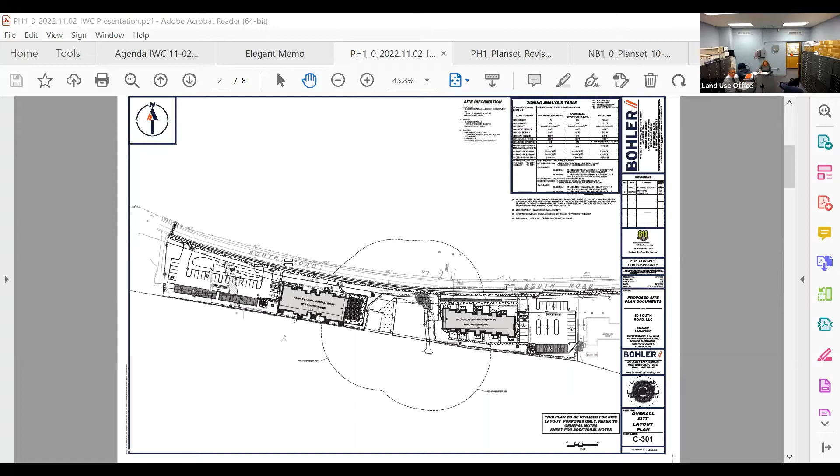Okay, so with that, we'll call the meeting to order. First item on the agenda is a continuation of the public hearing, 80 South Road LLC and Sager Development LLC.

I know, Jeff, do you or Phoebe want to take this, or do you want to give it off to the consultants? Thank you, Mr. Chairman, I'd give it up to Tim Hollister. Yes, I'm here, thank you. Can you hear me, Mr. Chairman? Yes, I can. Great.

Good evening, Commissioner Hannon and commission members. Tim Hollister, representing the applicant, along with Jeff Sager, Phoebe Sager, our consulting engineer Jeff Bord from Bohler Engineering, and our soil scientist Megan Raymond from SLR. Thank you, as always, to Mr. Sear, Ms. Rutherford, and Ms. Michaud.

Since we were here on the 19th of October, the applicant has responded to all of the staff technical and engineering comments. They were submitted to Mr. Sear last week. Basically there's no substantive change to the plans. I'd say most of the responses, which I believe were 75 in number, were information provided to clarify details. But I want to have Jeff Bord of Bohler Engineering take a brief couple minutes to explain the responses he filed. Jeff, go ahead please.

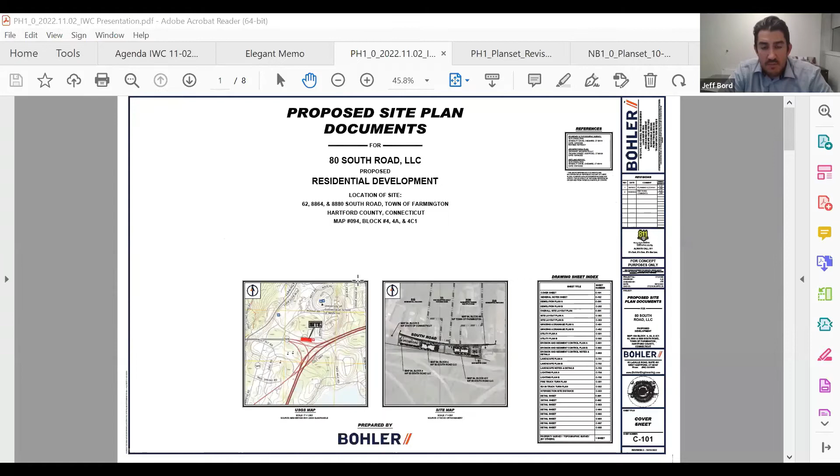Thank you, Tim. Hey Bruce, for the purposes of this presentation, this is the slide deck we had from the previous presentation. If you can go to slide 8, I think that would be the best representation of the colored rendering blowing up the area within the 150-foot upland review area. So to Tim's comment, out of all the comments we received, no substantive comments were received as far as the wetland impacts go.

As I presented at the last hearing, we did provide engineering documents that took the state DOT drainage discharges out of directly impacting the existing riprap in the middle of the site. Prior to our redesign, we originally had a pipe that was going directly to that riprap at the culvert, and I know on the site walk it was brought up that there was some destabilization that had taken place of that existing culvert. So part of our redesign efforts, we included notes to replace that, restore it in kind to what it should be with new riprap.

Part of what came up at the last meeting was also in regards to invasive species within the channel itself, so we had agreed to remove any of those that are encountered.

And I guess the biggest change from our end, and it affects the southwest portion of the upland review area to the rear of Building A. Originally we had a 5-foot retaining wall that came off the back side of those doors that exit the rear of that building. There was a retaining wall right on the property line that introduced about 5 feet of fill on that corner within the upland review area. One of the comments was the relation of that wall relative to the property line.

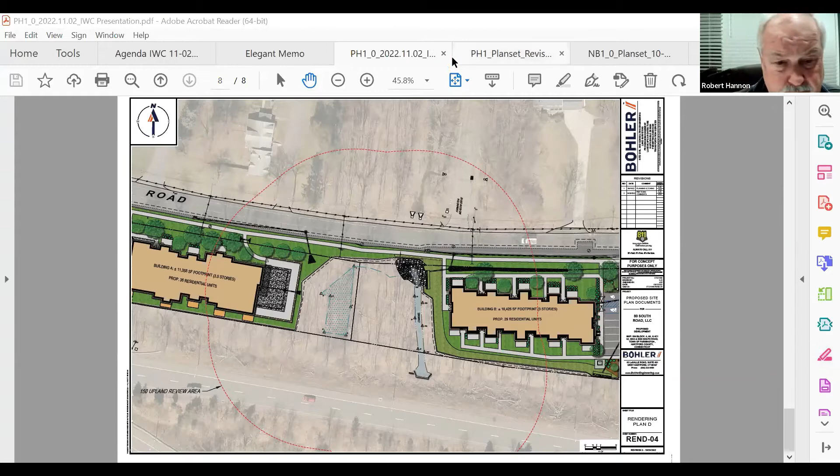And I want to note for everybody's information that Megan Raymond is running the New York Marathon on Sunday. Go Megan. I have one question, Louise. I have a simple question for you, Megan. Why? Take Bob with you. Bob would love to do it. No, right now I'm in COVID protocol, folks. Mr. Chairman, she's too modest to say it, but my understanding is last time she ran, she killed it. Well, yeah, I wish you the best of luck. It's going to be a great weekend, I think. Yeah, it'll be fun. Thank you so much, guys. Okay, good luck. Take care, everyone. Bye, thank you, bye.

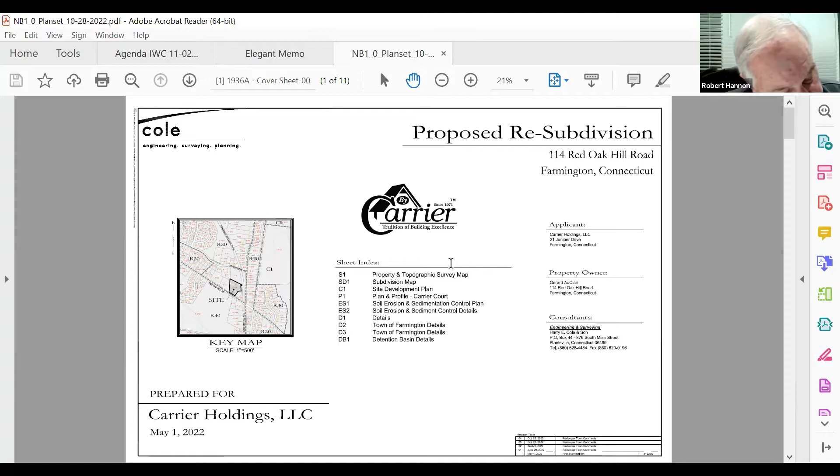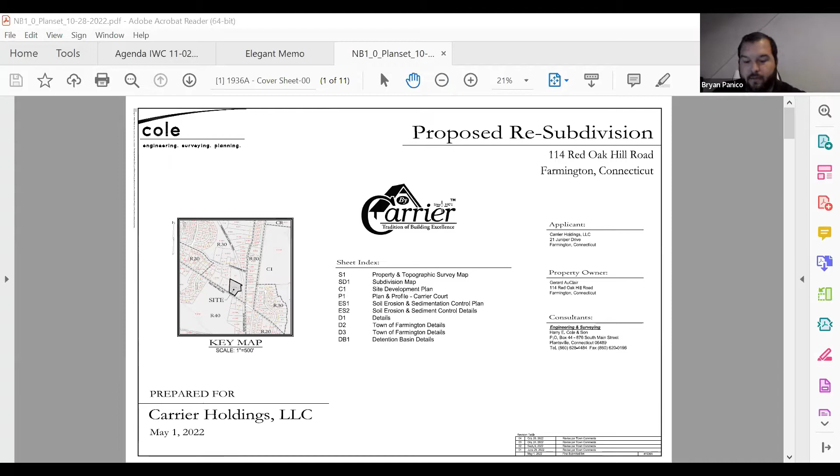New business. First item under new business, Carrier Holdings LLC. Yep, and I think we have Bryan Panico from the engineering firm here. Yes, for the record, Bryan Panico, Harry Cole & Son, 876 South Main Street in Plantsville, here on behalf of Carrier Holdings.

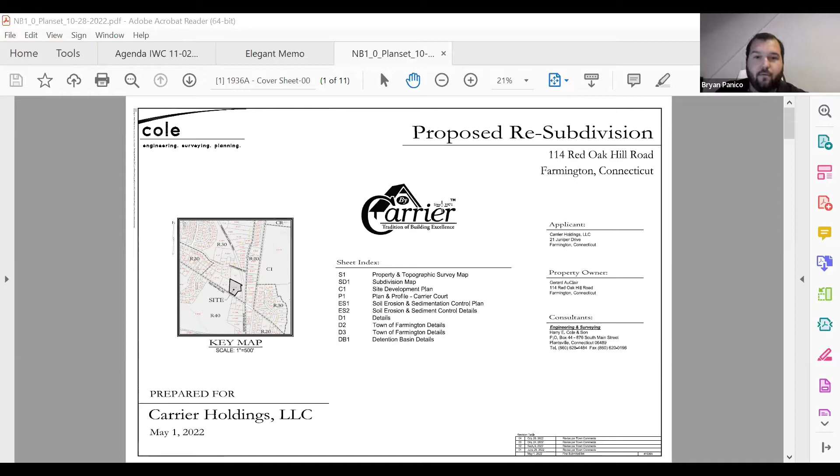Just to do a quick recap of the project: this is a 4-lot subdivision, 3 new lots, 1 existing home, on Red Oak Hill Road. So the proposal is for a new subdivision off of a private drive cul-de-sac. I know that we kind of went through everything at the last meeting; I just want to touch base on a couple of the key factors.

Stormwater management: everything is being collected at the road through a series of 2 catch basins and then discharged to a detention basin highlighted there. One of the changes to that detention basin was adding a low-level pipe in the infiltration trench, just to promote a little more infiltration and keep that a dry detention basin. And then we raised the orifice in the outlet control structure, which is a 90-degree V-notch, up 6 inches to try to promote as much infiltration and keep the groundwater flowing into that wetland as possible.

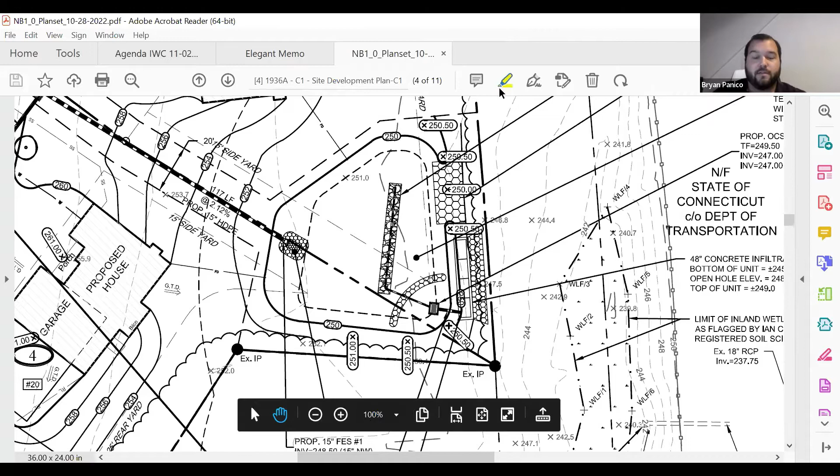Another change to that detention basin: we added one more of the concrete infiltration discharge structures. To recap, those are basically 48-inch galley units, the ones with holes on the sides. What we do is put those underground; the outlet control structure feeds the water into those. They fill up, and when they reach their maximum potential, the water flows out of the top 2 rows.

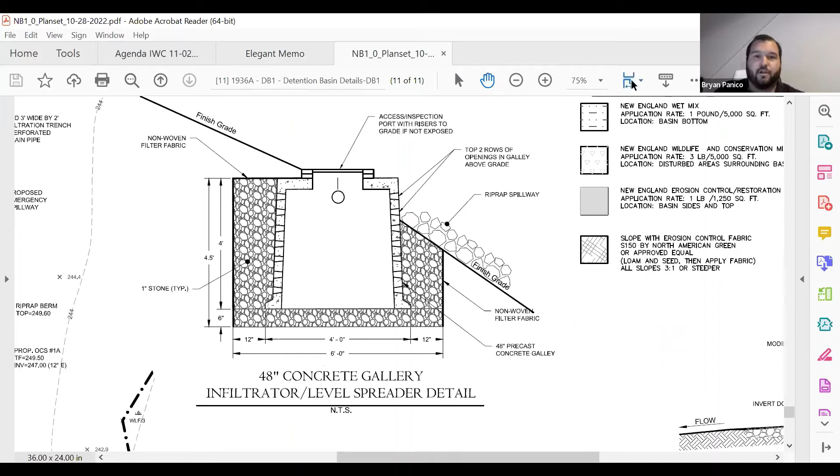Bruce, I think it's on the last detail, right there. The water will flow out rather dissipated, with less energy than it would out of a standard level spreader or flared end, and then it will slowly work its way, sheet flow back overland to the wetlands. So the change was just to add an additional one of those to reduce any potential for erosion along that dissipation area.

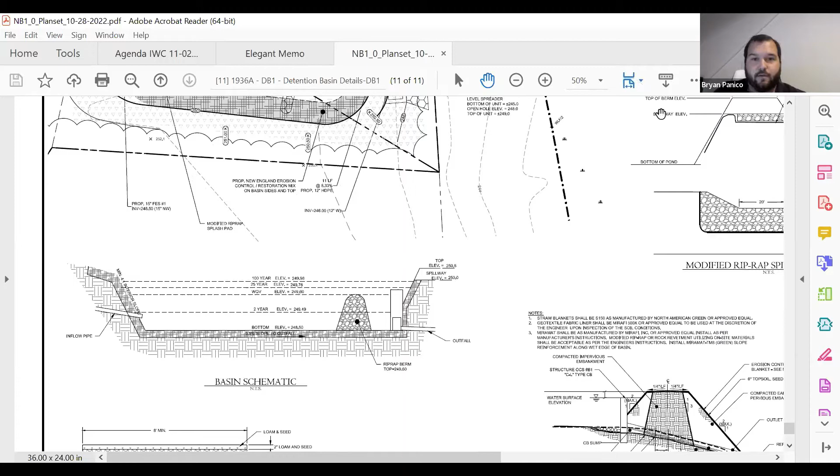Other changes to the plans, which I know Bruce had mentioned we weren't able to submit until about Friday, included adding a double row of silt fence along that entire eastern portion of the property, just to protect the wetland and everything downstream. We also added temporary sedimentation basins uphill of the primary detention basin, and silt fence in front of the detention basin to protect it during construction.

We also added notes basically saying that anything that's going on with that existing house, there are some structures that need to be removed, and there is some maintenance on the downhill portion of the culvert crossing where it goes underneath the trail. The maintenance needs to be part of this application, but any future maintenance of the stormwater system, or anything else not part of this, would have to come back before this commission for approval.

We also had a lot of minor changes to the stormwater management report, and just did some more changes to notes and stuff like that. But as far as the overall plan and presentation from the previous meeting, the overall plan hasn't really changed.

If there's any further questions on this, I'd be happy to go into a little bit more detail on any of these items. But I think the commission had a pretty good handle on it at the last meeting, and I think everybody was pretty comfortable.

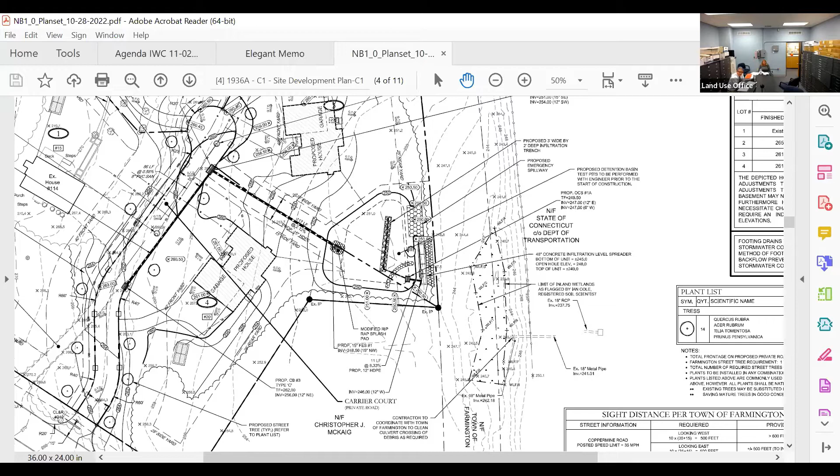Were there any other comments from any other personnel on this one? Or Bryan, were you it? No, I'm just looking to see. Oh, I guess, okay, so Ned, any questions, comments, concerns?

I'm not sure how much clearing is being done here in regards to removal of trees, and the other question was, is this going to be a town road or is this going to be a private home subdivision road?

So this is a private road. And just to kind of recap again, I apologize. There are no wetlands on site, and we have no wetland impact. There's approximately 16,000 square feet of upland area on site, and there would be a total. The clearing is about 14,800 square feet.

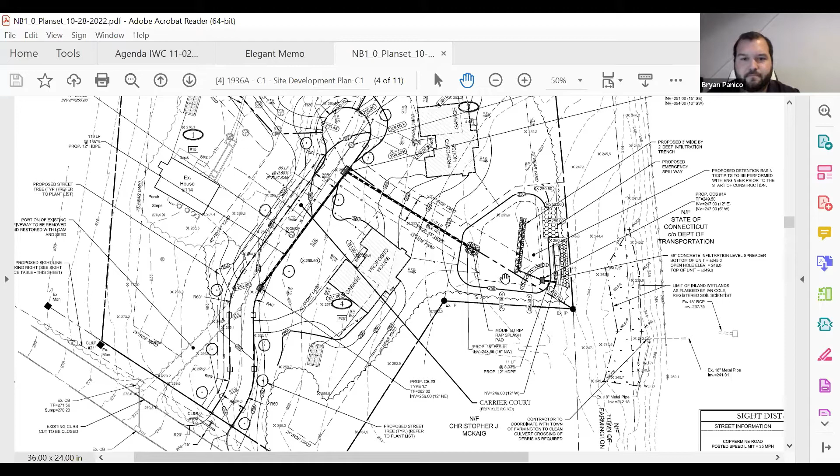The only portion of that will actually be impacted by a structure would be the house on lot 3, and that's about 350 square feet of that upland area that's being impacted. Most of the upland area being impacted is being used for the detention basin. Okay, that's all I have right now. Thank you.

Chair, are you there? Mark? No questions. Thank you. Neil? Yeah, so in looking at the map,

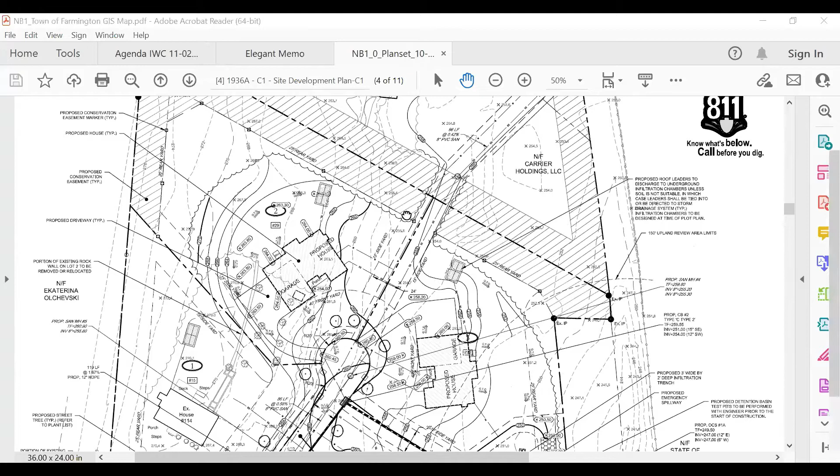quite recently, there has been a lot of work done and clear cutting on some of the properties north of this parcel. I don't know if it's property 1, 6, 2, or 4, but they've taken down a lot of trees, pretty much clear cut the land, and I know there's some development going in there. Has this project considered how that project is going to change the flow of water or impact this project at all?

Yes, so it is actually the same developer who's interested in doing this project as did that project. And so what we looked at from a watershed area, most of that project actually is being directed to the north. There's a detention basin on lot 1 there where Bruce is highlighting. There is a small portion of runoff that does come to the south through lot 6 down into that bottom corner. And we did actually take a look at what the flow from that would do

to the culvert and the kind of natural swale that exists between this property and the trail, that portion of the property that the town of Farmington owns. And so basically almost all of the water from that northern development, none of it really comes to this site.

All of that water flows from a westerly to easterly direction, and that's why the road picks up most of that water and it goes north. The portion of lot 6 that doesn't still flows west to east, and then after it reaches the trail, flows north to south. So none of that stormwater runoff from that development actually ends up on this property. It more or less runs through the Town of Farmington property and down to that culvert that runs under the trail. But we did analyze that culvert to see what the capacity would be with both the post-development conditions of that project to the north and the post-development conditions of our project, to make sure it could handle that, and it indeed did.

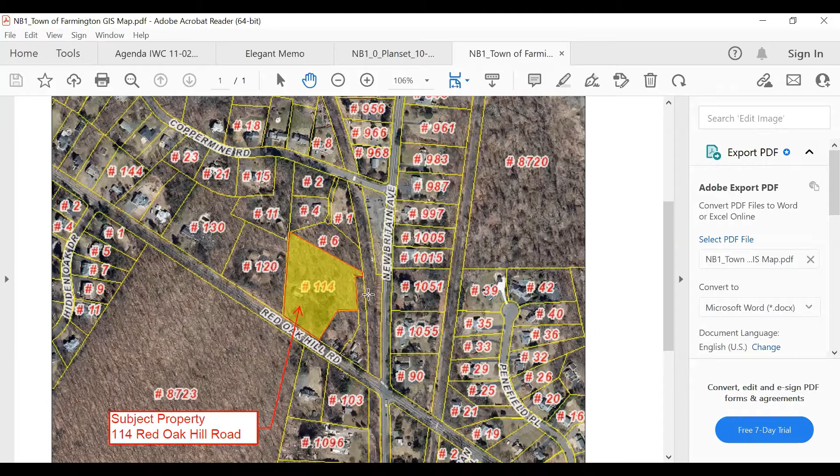And how much of lot 6 is being cut? If you go back to the subdivision plan, you can see on the north end that hatched area is the conservation easement. So technically it could be cleared up to that portion. The calculations for that project assumed tree clearing up to those limits, with the rest being grass for their rear yard and side yards.

And then you're taking the same approach on lot 114, so you're getting as close to that, leaving a strip in between the two. Correct. We basically tried to expand what was there and match it in order to create a buffer between the two projects.

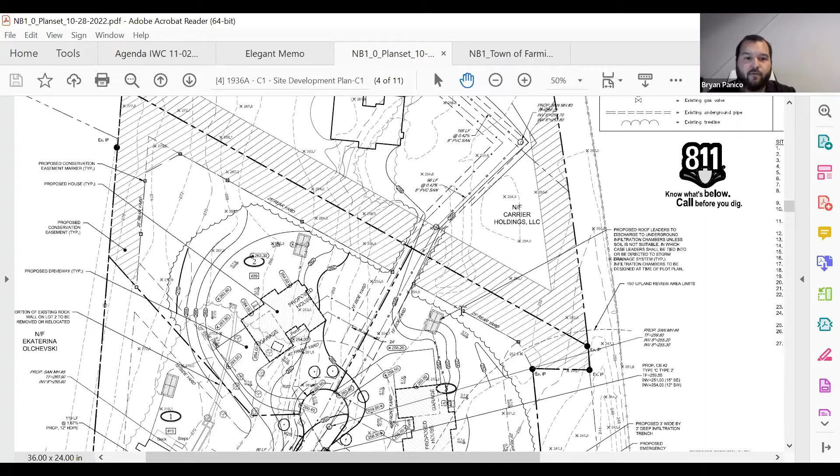Okay, thank you. Yep. Thank you. Robert? No comments. Okay, thank you. Dave?

I was wondering, it doesn't look like there's a hydrodynamic separator proposed prior to the discharge to the detention basin. Has that been considered at all? So typically with a project that's more residential in nature, especially being such a small development, the basins are all proposed with 4-foot sumps, which will take some of that out. And the basin itself, since it's so large but so shallow, essentially acts as a settling basin for any particulate coming out of the drainage system. Most of the flow from this site is really sheet flowing through the woods until it finally reaches that pavement. So the scale and the amount of impervious surface we're seeing with that pavement, and the size of the watershed area getting picked up, doesn't really justify the use of a hydrodynamic separator in this instance. The deep sump catch basins and the basin itself should suffice for all the necessary water quality. Okay, thank you, that's all I have.

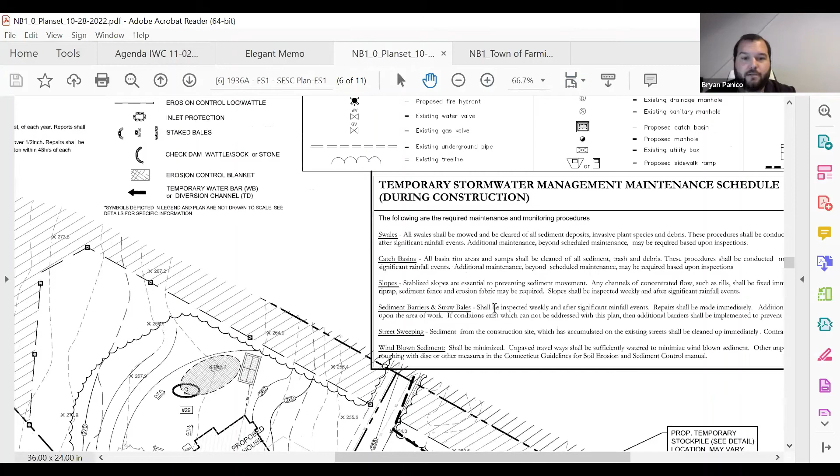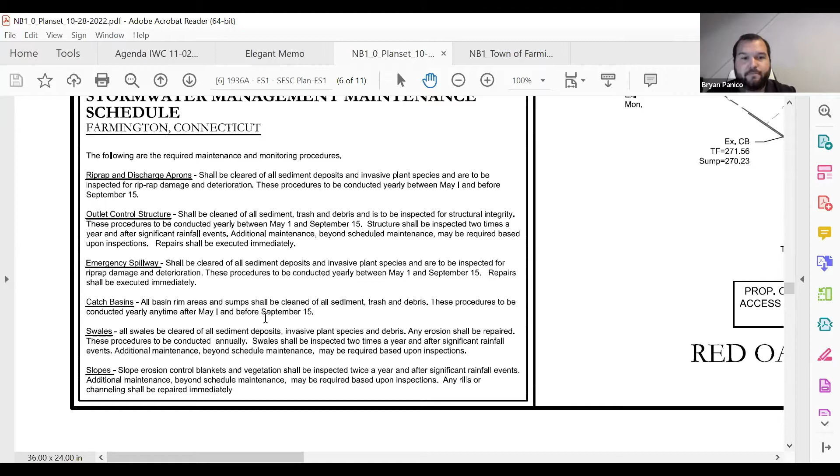Okay, thank you. Rich? I just had one question on the water quality basin. What arrangements are being made for maintenance of that? Since this is all going to be a private road, that would be the responsibility of the homeowners association. I know we added language into the plans regarding not only how they maintain it, but also reporting to staff or the town. Generally speaking, since we're not using that as a temporary sediment basin, we try to keep it as clean as possible during construction, and then post-construction, once everything is stabilized, some representative would come out for the homeowners association, do an analysis of it, and then it would just have to be cleaned of any sediment and anything that were to occur over the life of the project. Okay, thank you very much, that's all I have.

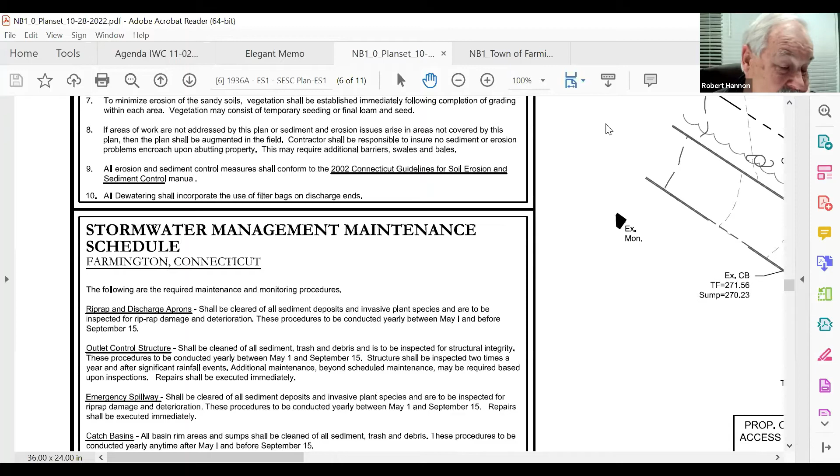I do have a couple of questions and a comment. My comment is, if I understood you correctly, Bryan, you stated there would be a double row of silt fence installed in the eastern part of the property. I'm sorry, but I'm not one of those that likes silt fence, especially as it comes close to wetland areas. Comment number 28 on engineering also says to add straw wattle silt socks in addition to the silt fence along the easterly portion of the property. I would be looking at a silt sock or the straw wattle going in behind the silt fence, if anything. That's kind of how this commission has worked for years, and I don't really see any reason for changing that. So I don't like the idea of two rows of silt fence, instead one row of silt fence backed up by straw wattle, silt sock, whatever term you want to use. That I think is more appropriate for the area. That's my comment.

Question for you. Dave raised the issue about some type of stormwater separator, things of that nature. Would it be possible to put a hood on the catch basins? That might be relatively easy, and it may also minimize some of the maintenance.

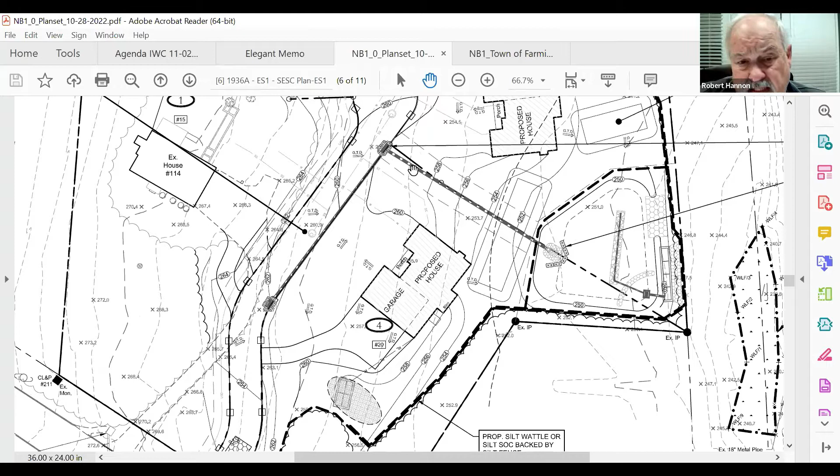Absolutely. Going back to your comment, I apologize, that was actually just me misspeaking, as Bruce was highlighting on the plan there. So it was proposed as silt fence. I actually said wattle backed by silt fence, but we can switch that to say silt fence backed by wattles. That should take care of that.

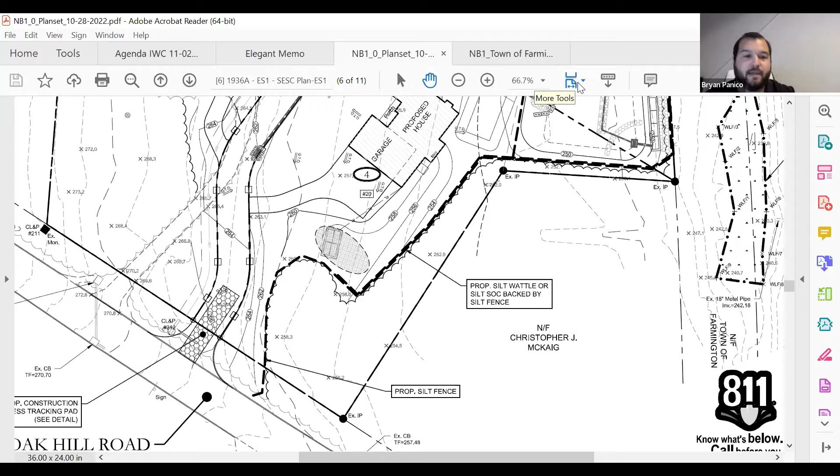Absolutely, I think generally we would recommend putting a hood at the last catch basin before it enters the basin. If you'd like to see it on both of them, I think the applicant would be agreeable to that. They'd be more concerned about that last point of discharge at the basin. That's probably more important, and again it may help with maintaining the basin as well.

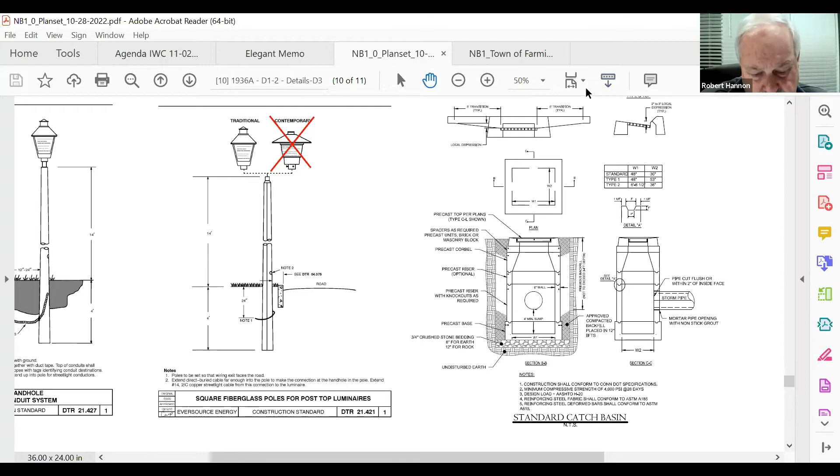My other question deals with the basin. I believe there was a comment on the plans that said you have not done percolation tests yet regarding the trench that's there, I believe 2 feet deep, 3 feet wide. How positive are you that putting that in is going to get you to the desired results of the water actually infiltrating? Have you done any soil testing at all, or at least, if not so much perk tests, have you done any testing to see what kind of soil is there, making sure there's no hard pan?

At this time we have not, and that's why we have the measure of that 6-inch perforated pipe underneath there, so that in the event that it is a very slow draining type of soil, the basin will still be a dry detention basin.

I believe, let me take a look. I believe that when we had done the project to the north, the soil actually was relatively good soil, kind of a sandy loam, kind of bony. I know that the state of Connecticut soil mapping was showing that as a B soil. If you bear with me for one moment, I can let you know exactly what that was. Cheshire fine sandy loam, B-type rating.

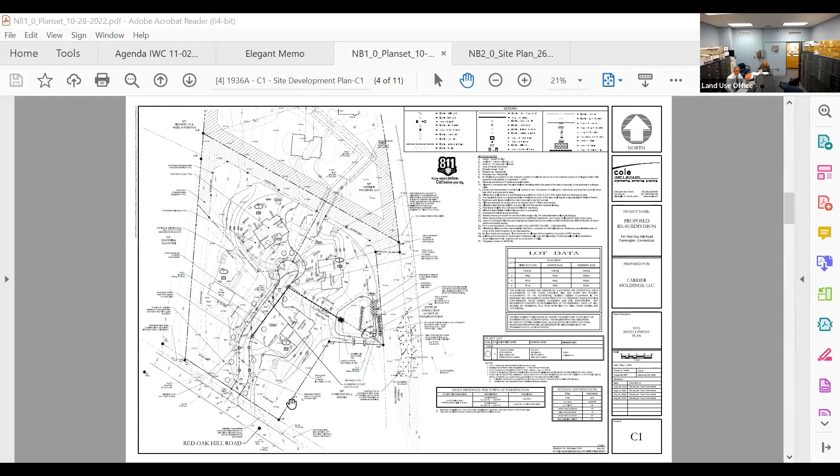Let's see, you there? Yeah, I'm muted. Muted. Well, most of my points are moot anyway, so.

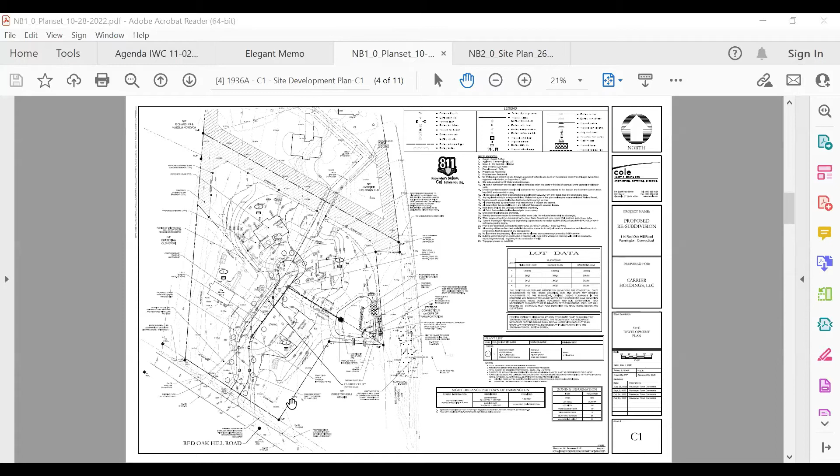I just had a question about the property on the corner. It's listed as McKaig, so is much of this, because I'm trying to figure out the contours. So how much of lot 4 could be draining onto his property? Because I know I see 258, 256, 254, it looks like it's going to start draining in that direction, because that won't make it to the sediment basin, I wouldn't think. And is that going to be a significant increase in drainage as proposed compared to when this was just forest?

So we did look at the flow through there, and actually if you look at the contours, roughly where the cursor is, it looks as though they dug a trench or swale of some sort there already, to pick up basically all of the side yard of the existing house as the water flows down the hill and direct it into the wetland. As of right now, the way this is designed, only a small portion of the front yard of the house on lot 4 will actually drain that direction. The rest is graded to drain from a high point roughly where the garage is, around the side of the house. And then a portion of the rear yard, directly behind the garage, will also drain toward that direction.

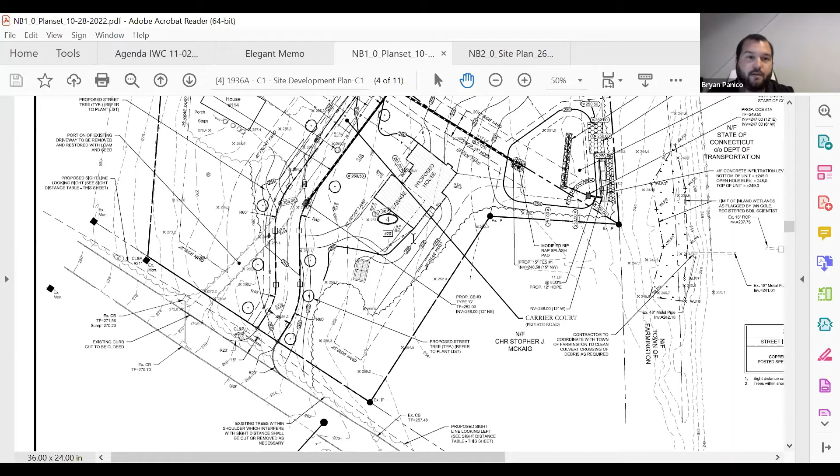So when we were looking at the overall watershed area right now, the proposed road will cut off all of that drainage to the west that used to come straight down the hill into basically the yard of the neighbor there on the corner. So we've reduced the drainage area pretty substantially that was draining to that property compared to what would be draining there now.

Okay, and then the existing 18-inch metal pipe that's coming off of the wetland and bringing it underneath the rails to trails, is that still going to be sufficient?

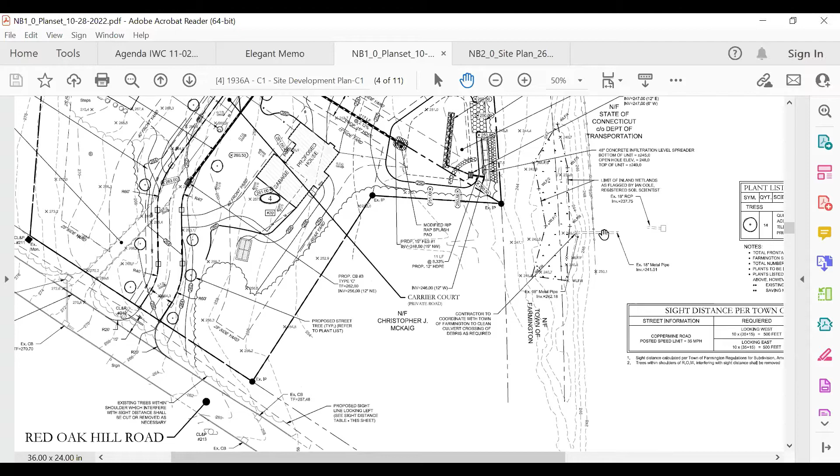Correct. So as part of our stormwater management report analysis, we did an analysis of that culvert, and that's what I was talking about when discussing the project to the north. We looked at the total development of that project, what was draining to the culvert, and then we also looked at our total project impact and what it would have draining to the culvert. And what we found was that pipe would in fact be sufficient to handle that without backing up to any great degree throughout that area.

So currently, where the wetland is, as you can see outlined, is basically the low point along the trail there. And that pipe is actually elevated, so it's not at the very bottom, not at the ground. It sits up slightly from grade. And that's most likely what actually caused that wetland over time. If that pipe was at grade, all the water would have constantly drained out, and it wouldn't be inundated in that little pooling. It wouldn't have a place to pool.

So right now, with our analysis, what we figured out is that the water will essentially, as it fills up in that little pool area and starts to discharge through that 18-inch metal pipe, not only will that pipe be able to handle it, but that water will still stay on the Town of Farmington property. It's not going to back up and impact any neighboring properties, even through the 100-year storm that we analyzed.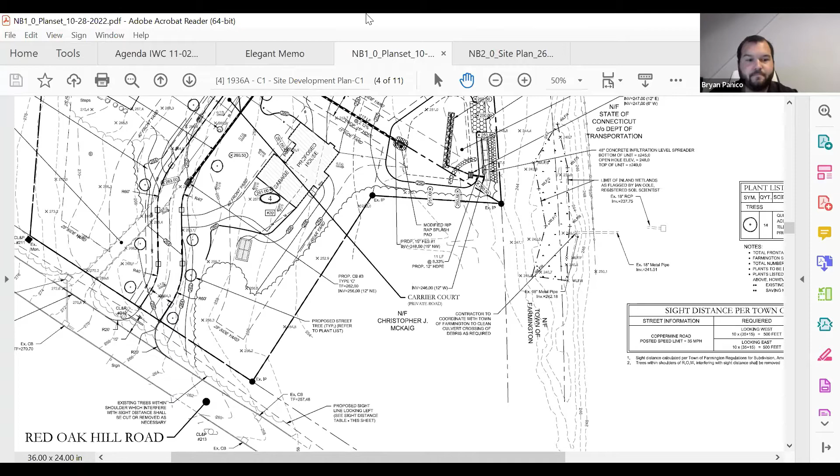Okay, next item on the agenda is 26 Taine Mountain Road.

Yep, and we have the engineer here. He's Tom. Good evening, my name's Tom Grimaldi. I'm a project engineer from Hillbrand Engineers in Bristol and Granby. Project's located at 26 Taine Mountain Road in the Unionville section of town.

There's an existing—let's start on the right side of the house, Bruce, where the garage is. There's an existing septic tank there, and just down slope, it's a little bit difficult to see, is existing leach field. And then there's a circle just below it where a dry well is. It's a gray water system. And over to the right-hand side of the proposed tanks, there's also another portion of leach field right in there, Bruce.

Yep, that's great. So currently the existing septic system is failing. There's been backup in the dwelling and breakout onto the ground. There's no one currently living in the house, so that's not an immediate concern of that failure because there's no one discharging water into the system. The existing system at its closest point in the back of the dwelling is 10 feet from the limit of inland wetlands and 13 feet from the intermittent water course. The section of septic leach field on the right side of the garage is about 13 feet from the wetlands and approximately 26 feet from the water course.

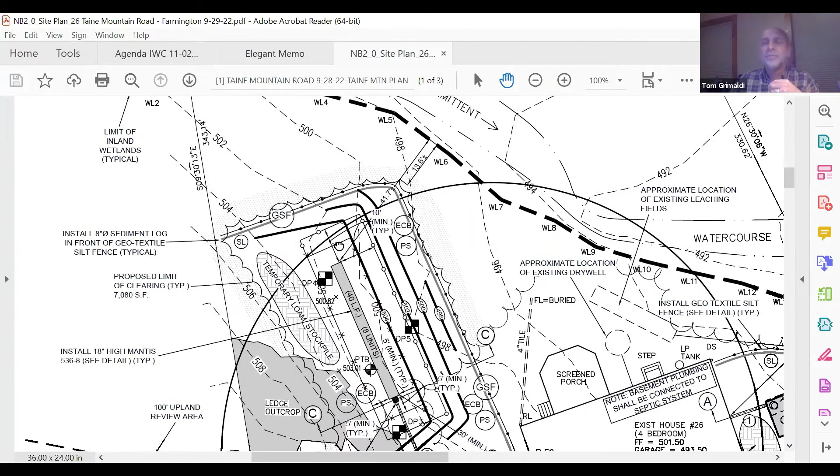Emily? Could you repeat for me the distance from that intermittent watercourse? It's 41.7 feet from the closest corner perpendicular to the wetlands, and 45 feet perpendicular to the contours in the direction of flow. Okay, thank you so much.

Dave? The existing leaching field is just going to be abandoned? Yeah, so now that no one's living in the house, that will not have to be touched. It'll be abandoned in place, and any of the biomat that's in there will renovate itself over time, and it'll be disconnected. The dry well will be disconnected as well, which is a gray water system off the back. Okay, thank you. That's all.

Thank you. Robert? I agree with Commissioner Berlanti. There's not a lot of options with an existing house with a failing septic system. So if it was a new lot being proposed, it would be a different story, but this is necessary work given the existing failure. No additional comments.

Neil? Yeah, I agree. Not a lot of options, and it's necessary work. Mark? No comments. Not an area of expertise for me.

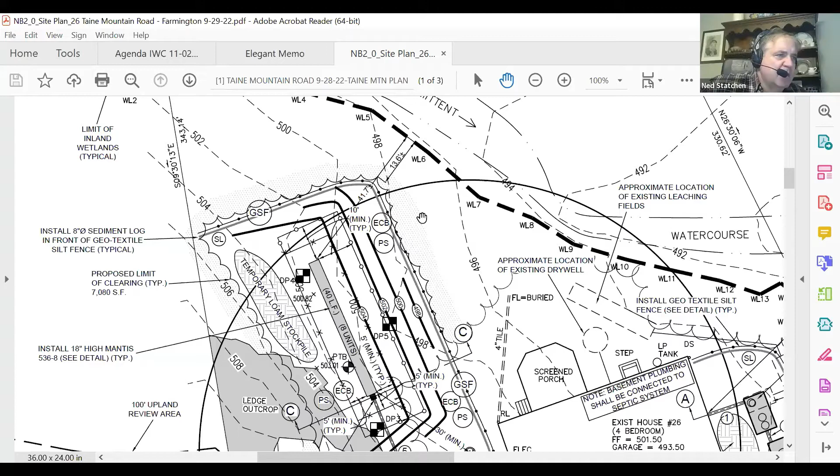Okay, Ned? So the proposed tank is basically going where the existing tank was, and then you're adding the pump chamber. That's correct. Yeah, so we're turning the tank 90 degrees to the existing tank. You could just see the existing tank underneath there, as pointed out. And so the new tank will be 90 degrees to that. The existing tank's way undersized, so this tank is a 1,500 gallon tank, dual compartment, outlet baffle and filter. Cleans up the sewage effluent. We get about 80% pre-treatment in these dual compartment tanks.

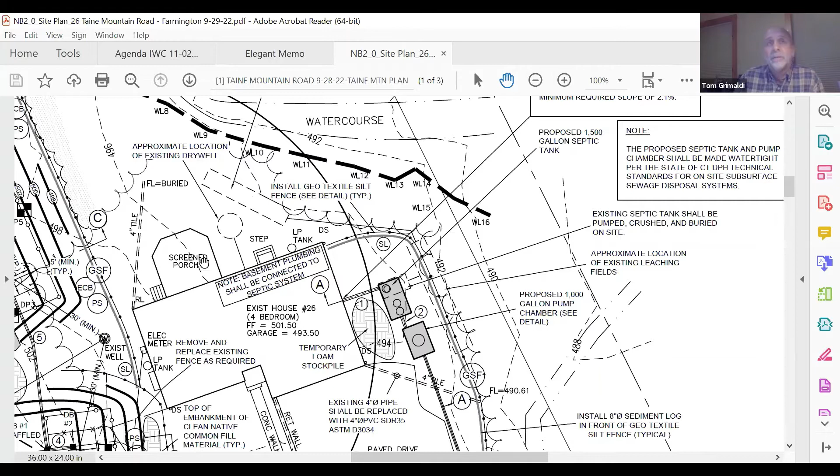Okay, and then the abandoned leach field, is that just pipe and stone, or is it any kind of built-up member or something like that? No, it's actually way into grade, probably into the groundwater table. I think it's at least 2 feet into grade, and it is pipe and stone, as well as the dry well. That's pipe and stone as well. Okay. Yeah, with all this ledge and the tightness of the property, I agree that there aren't a lot of options here. That's all I have. Thank you.

Okay, thanks, Ned. This is just sort of a curiosity question. Is the well in bedrock and it's sealed there? Yeah, so the casing runs down to the bedrock and then it's grouted. One of the conditions of approval from the State Health Department was to have the well raised above grade, just in the past year. That well, they tested it, so they have a baseline, and the State Health Department is recommending that they test it again in a year after the leach field is installed, just to verify that everything is okay. I have to tell you, in 33 years of doing this work, this is the first time I've asked for a variance that close to a well.

I understand what you're saying, because I cringed a little as well. So I cringed when I walked onto the site, Mr. Chairman. And then, in terms of how old is the house, do you know offhand? I think it was from the 1960s in that area.

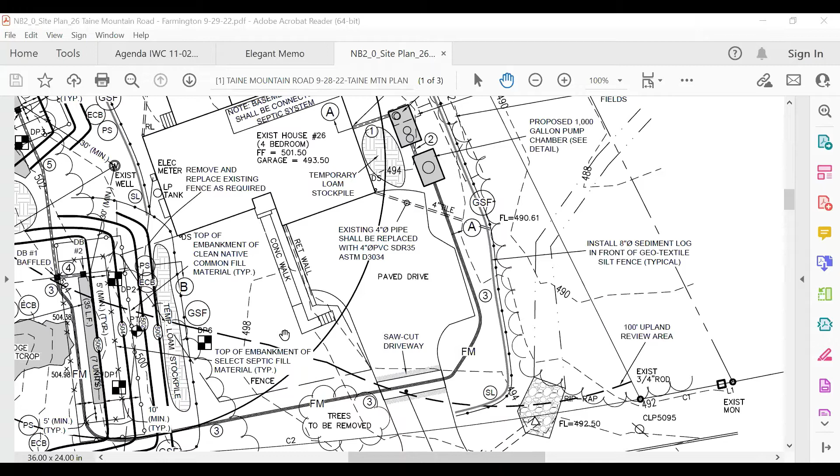Okay, thank you. So can I get a motion that this is a non-significant regulated activity? So moved, Mark. Is there a second? Second, Ned. Okay, thank you. I have a motion on the floor to accept this as a non-significant regulated activity. All those in favor, please signify by saying aye. Aye. Opposed, abstaining.

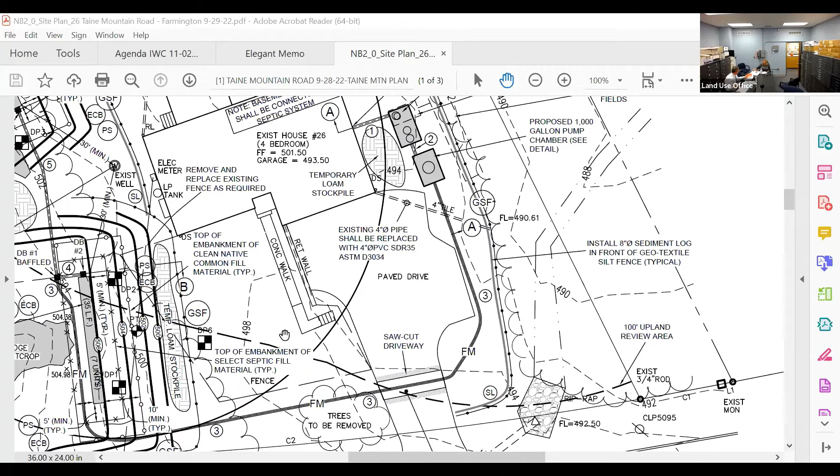Okay, so we've gone about as far as we can go tonight. So this will be on, what, December 7th - is that the next meeting, Bruce? December 7th. Yep, 7th. Okay, so this will be on for an action at that point in time.

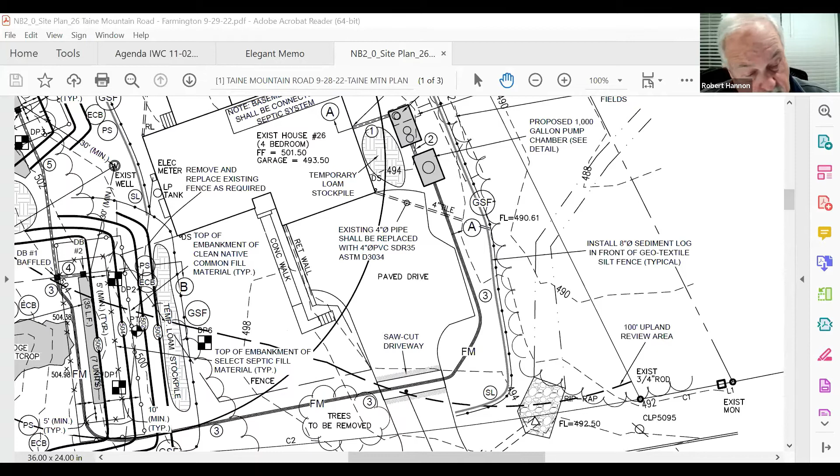You're quite welcome. Next item is lot 8745 River Road, right? Yes, I think the applicant is online. My name's Todd Clark from Blue Moon Design, 168 Main Street in Terryville. I'm helping Ashley out, who happens to be my daughter.

I'm going to speak for her just because she gets a little nervous with public speaking. As an architect, I'm only trained to think I know everything, but I'm going to try helping her out with this approval process.

Basically, it's approximately 3/4 of an acre of land that borders Connecticut Light and Power to the north. The Rails to Trails is to the west. There's a commercial piece of property to the south, and the Farmington River to the east.

The property line to the east is layered with three things: the 100-year flood zone, the high water mark for the river, and the property line. That created maybe 20 square feet of the water course being on the property along the east side.

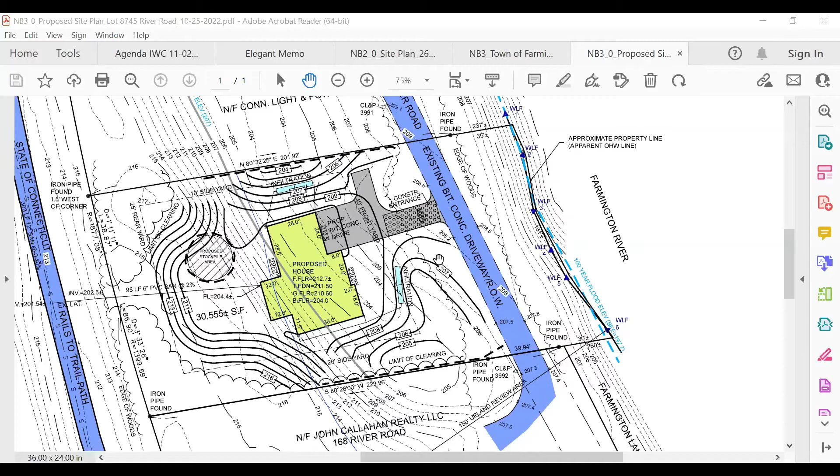Yeah, I echo Robert Hannon's comments. To me, one of the more critical things here is the erosion sedimentation control, both in terms of construction and also once you start trying to finalize the property, getting things to grow on it.

And making sure we're not having any type of runoff problems. There's a fair amount of grading. It looks as though a lot of it, I'm trying to see, Bruce, where's the north arrow? I'm assuming north is up. Okay, so it looks as though the low spot is going towards the south, down towards the 204. Goes this way and goes that way.

I'm looking at where the limit of clearing is down to the southeastern side, where it almost looks like it's a little bit of a bowl that's there. It's naturally created. So some of the drainage goes that way. Just again, making sure that whatever's being done is not adversely impacting any other folks.

The other thing, and this is just based upon some of the weird weather patterns that we're seeing all across the globe - I think you've got the 500-year flood elevation, and I thought I heard Ashley say it was 207. That's correct. So some of the area that is actually under construction for grading falls below the 207. So it's one of those rare occasions you may need to have a plan in your back pocket in case we see one of those weird weather events - something you might be able to do on the site to stabilize or make sure you don't lose a lot of what you had.

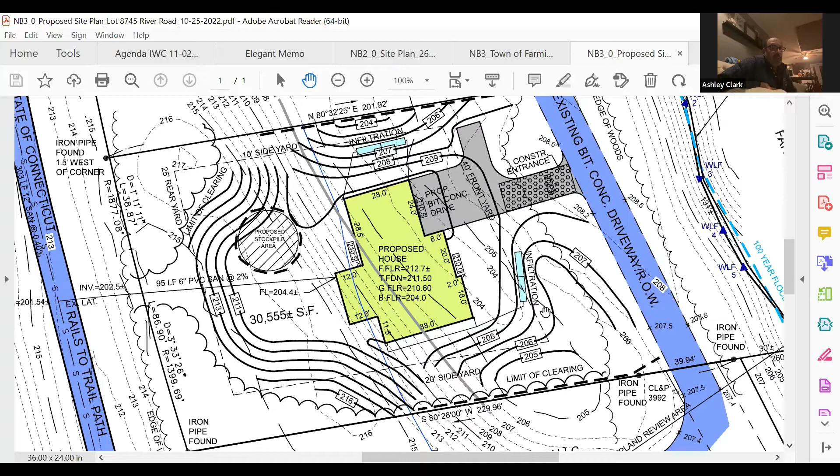The first floor is 212. The backyard, as you step off into the backyard, is at 211. So it's going to be substantially higher than the 207 elevation. Yeah, again, my concern is if you're going to get emergency personnel going there, they're going down most likely the driveway right of way, so that's just a concern I have, having done some work in town over the years.

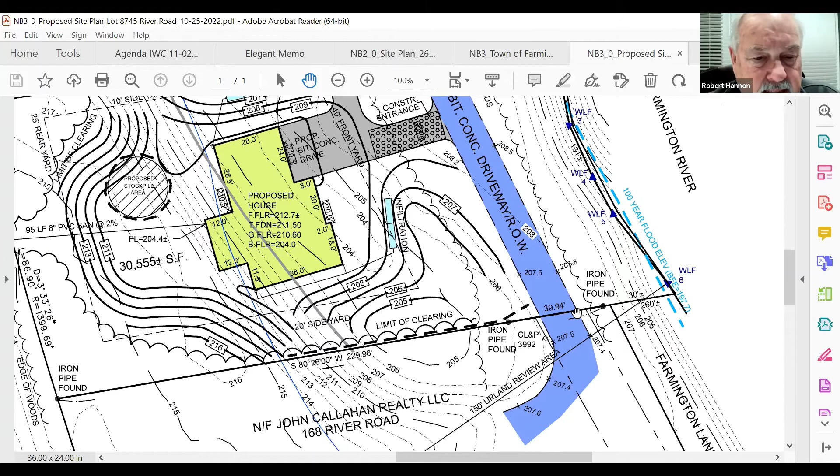But I know if it was commercial, basically you don't have to worry about people living there. So that's the one caveat on going with a residential development. I'm not saying it's a critical factor, but it's something that may come into play. There is a house to the north on the other side of Connecticut Light and Power. There's also an apartment to the south that's on the commercial land.

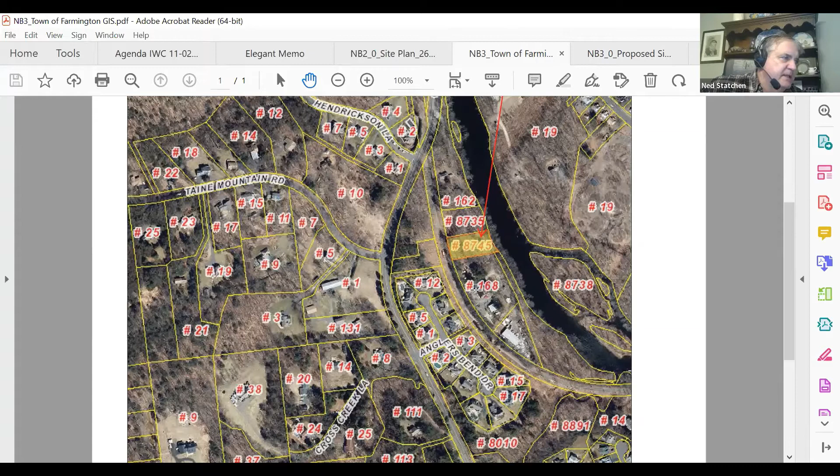The other thing I'm noticing is there's a low point adjacent, on the north, the Connecticut Light and Power land, 204. If you start to get a flood, water's going to pond there, and if the force of the water working within that ponding area can push the water up that's sitting there, I think it can go farther into that land. The elevation helps with still water, but when you've got a lot of force flowing in a river in flood stage, this little bit of elevation difference isn't going to offer a lot of protection.

And almost the entire house is in the 150-foot upland review area. So I don't know, there's a lot of challenges here.

So first things first, can I get a motion to accept the application? This is Rich, so moved. Is there a second? Mark, second. Okay, so you have a motion on the floor to accept the application. All those in favor, please signify by saying aye. Aye. Opposed, abstaining.

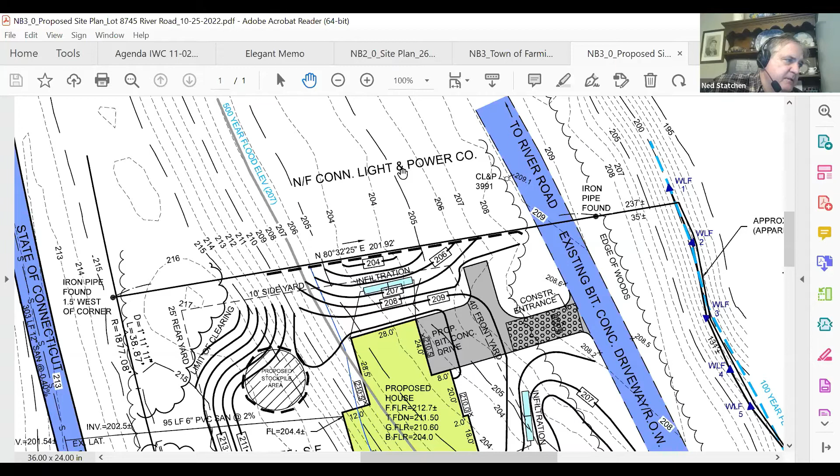And I would request that they don't have to get every corner, but maybe locate the four corners of the house. I know for our site visit. Okay, and I agree as well. So Bruce, we're going to hold off on a determination, but we need to schedule a site walk for this property.

We got some time, we don't have to be till December 7th. Okay, yep, and I'll talk with the applicant, I'll see when they can get that staked out, and then we'll go from there. And to be on the safe side, you might want to give us some directions, because when you start going on private roads, it doesn't always come up on GPS. Okay, we can do that.

All right, so I think that's about all we can do at this point in time, but we'll schedule the site walk prior to the next meeting, which is December 7th. Okay, all right. Thank you, appreciate the information.

Next item on the agenda is 93 Lido Road. How's it going? So far, so good.

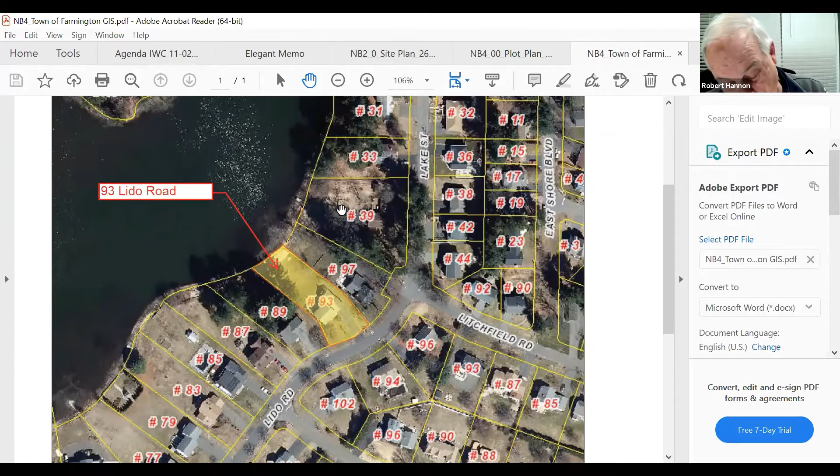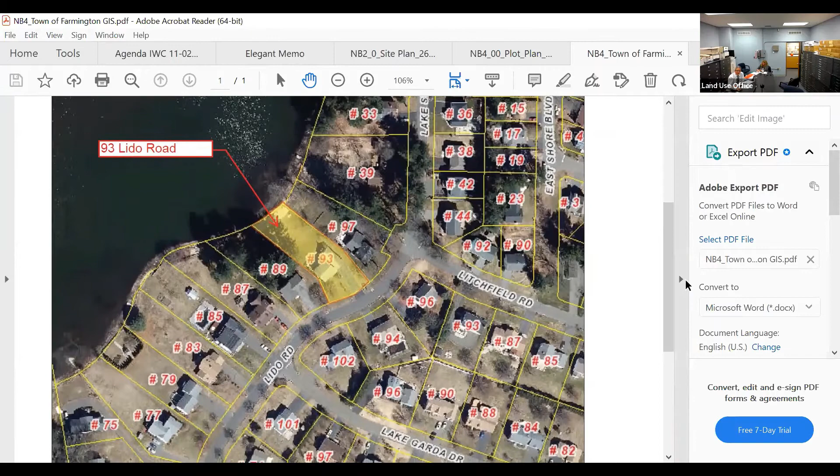Bruce, were you able to find anything out about the question that I had raised? Yes, I did, and we did get one, and I put it with the application. Perfect, okay, that just makes life a little bit easier. Oh, it does, thank you. That was just getting the signature from the homeowner, everybody. Okay.

So I believe you have some interest in this property, and would you care to explain what it is you're looking at doing out here? So the client has a pre-existing structure on the back of the house. Excuse me, can you state your name for the record? So I'm Matthew Kraus with New England Construction Home Improvement.

I believe my father, Brian Kraus, is here somewhere as well too, and I believe the client is present on her cell phone. So there's a structure on the back of the house. She was looking to turn it into an enclosed dining room to view the lake. The back of the house has no windows or anything like that, so the beautiful view of the lake she can't use.

So our understanding is none of that encroaches in the wetlands. I believe the one covered portion does. And then she was also looking to add a patio. I don't believe it adds any water to the lake, I don't think it affects drainage at all, it doesn't affect much.

And just for the record, commissioners, I put this on there, the GIS map just showing how much of the area, it's pretty much all lawn from the back of the house down to the edge of the lake. So they would be disturbing this corner of the property here. There's an existing patio there now.

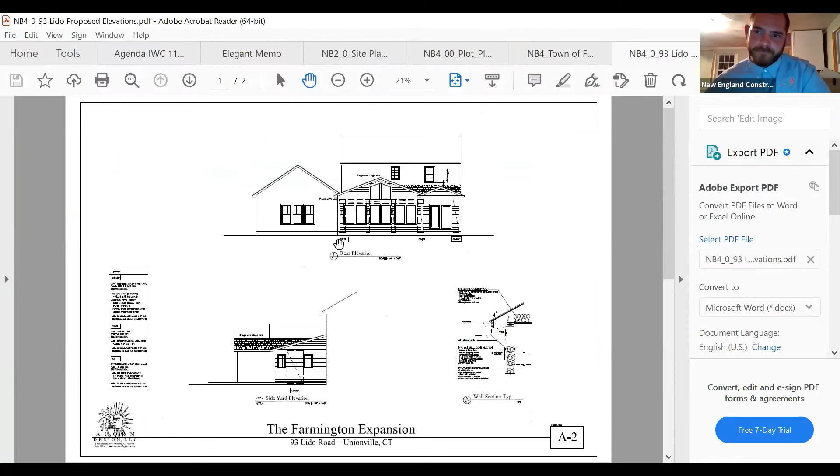So the deck is here, roughly the same size as the dining room. So they're gonna take that out, add this, build a dining room over it, add this covered porch area, and a future patio. So really the extension is the covered area and the patio.

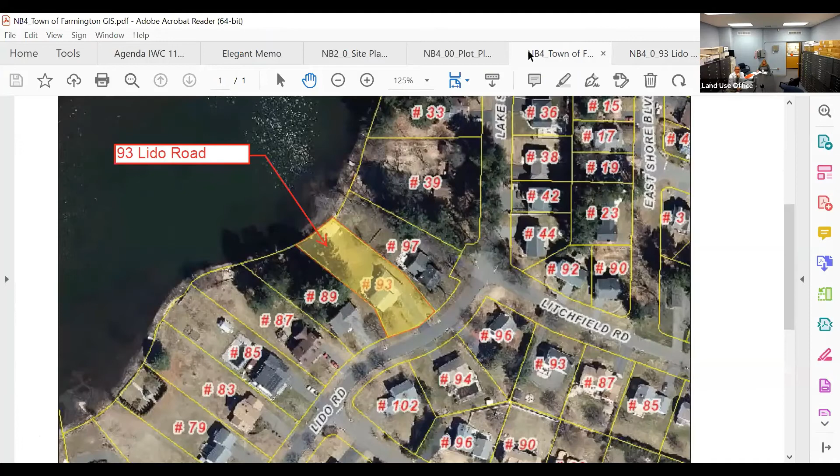But Bruce, just to interrupt for a second, I think the way we saw the original layout dealt with the structures that did not include the patio area, correct? Exactly. This plan shows he sketched in the addition and the covered patio. That's what they're doing as part of their application.

But then the homeowner is going to be looking to come in and do a patio after that. So we're kind of looking to just get it all approved at once.

That's the goal. Yeah, I just wanted to make sure I was clear that this diagram is just showing where the new dining room would go and the covered porch area. The patio is separate and it's not shown on this particular map. And that's fine, just want to be clear about that.

Okay, and now, so where you have addition on that map, yeah, something's -- because it looks like in the other drawing it comes kind of straight off of that.

This one here, yeah, okay. So there's the deck -- this is the deck / new dining room. Here's the covered patio area here, and then here's the patio, the uncovered patio area.

All right, so is there going to be excavation for a full basement, or is this -- so it's going to be a crawl space with a cement floor. And anytime we do that, we do a layer of silt fence around where we're working.

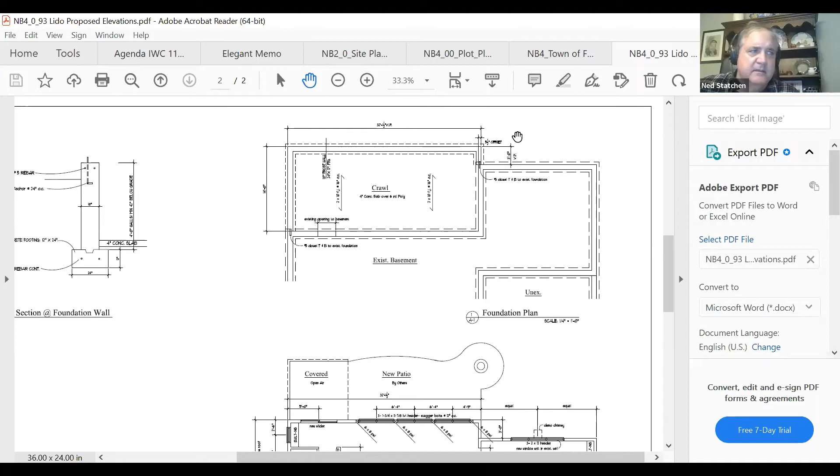Thank you. And Mark?

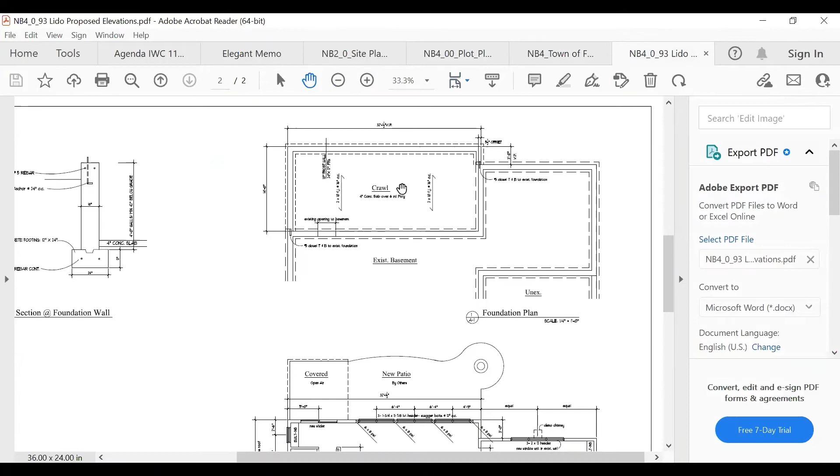So by looking at the diagram, the closest this addition is -- what, 110 feet from the water's edge, by what I could see? Yes. That's all, thank you.

All right, thanks, Mark. Neil? I don't have any questions at this point. Okay, thank you. Robert? This is either for the applicant or for Bruce.

Is the grade on the property relatively flat or fairly steep down to the lake? It varies. The portion where the addition is, it's extremely flat. Where the covered portico is going to be, it's extremely flat. Where the intended patio goes, they're looking to level that off.

From the point closest to the house towards the lake, it's about a 1 foot drop. So behind that would get a layer of filter fabric and silt sock. And then after that, Commissioner, just kind of a gentle slope all the way back down to the lake.

Very gentle. Okay, and the reason I ask is with 110 to 115 feet separating distance to the lake, and it's relatively flat, the potential for significant erosion is pretty minimal. So I appreciate the applicant already saying you'd be willing to incorporate silt sock based on conversations with other applicants before this. But beyond that, soil and erosion control during construction is going to be key. I don't have any significant concerns with the proposal.

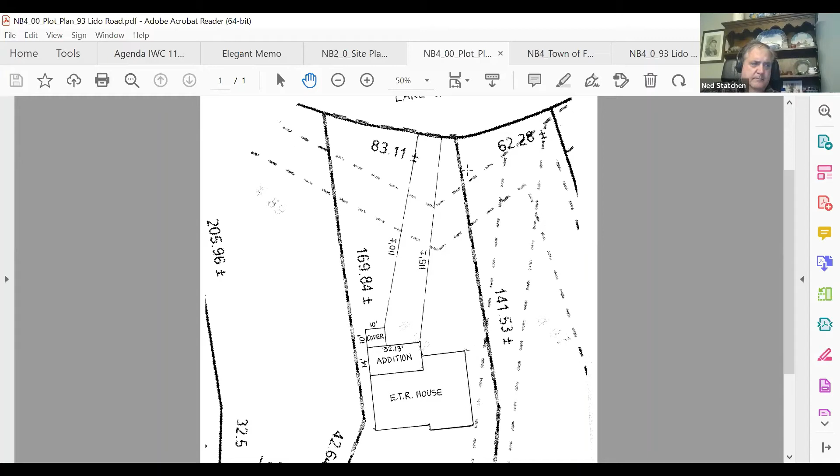So with that, I would move to deem the project residential use as of right, consistent with section 4.A.4 of our regulations. Okay, thank you, Robert. Is there a second? I'll second it, Ned. Okay, so we have a motion to consider this activity an allowed use under 4A.4, I believe, Bruce? Yeah, 4A.4. Okay, so all those in favor, please signify by saying aye. Aye. Aye. Opposed, abstaining? Good luck. Thank you very much.

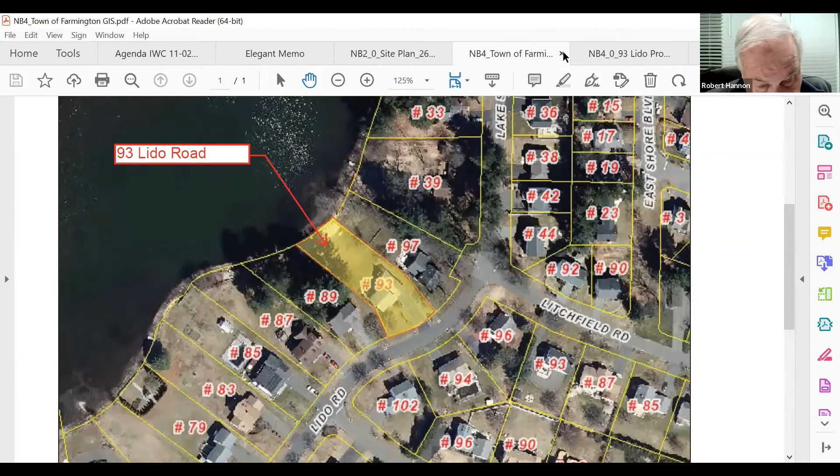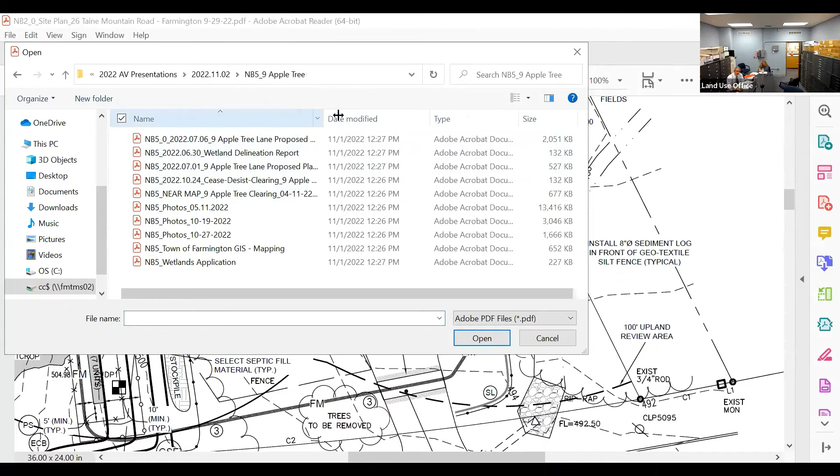Next item, 9 Apple Tree Lane, cease and desist order. So what happens when you don't work with staff, right? All right, Apple Tree. All right, this is the proposed plan set. And open. And then this one.

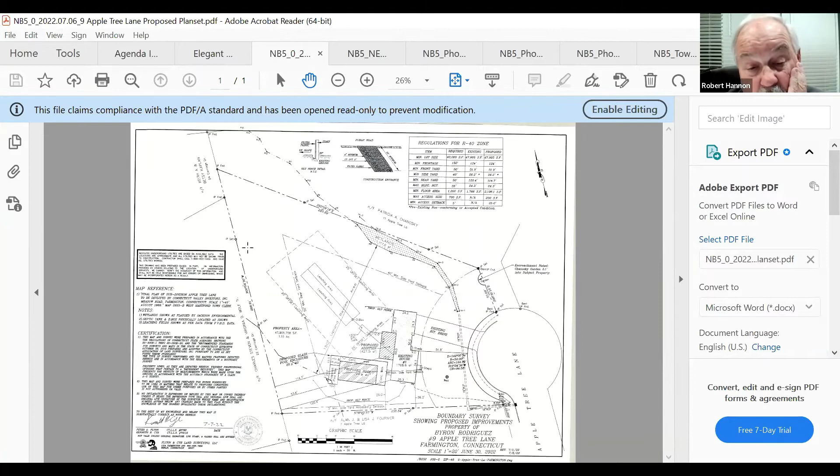Getting there, the application had a garage in the back. Come to find out, there were concerns with the size and what it was being used for, so the applicant pulled it out as part of the application. So the application was left to be just the addition and the enclosed pool.

It was approved. As you can see here, there was wetlands flagged on this side, as well as wetlands flagged on the other side along where all the water comes in. It comes down the swale, crosses through piping into a small opening, and then back into the piping underneath the apple tree down to New Britain. There's a swale here as well.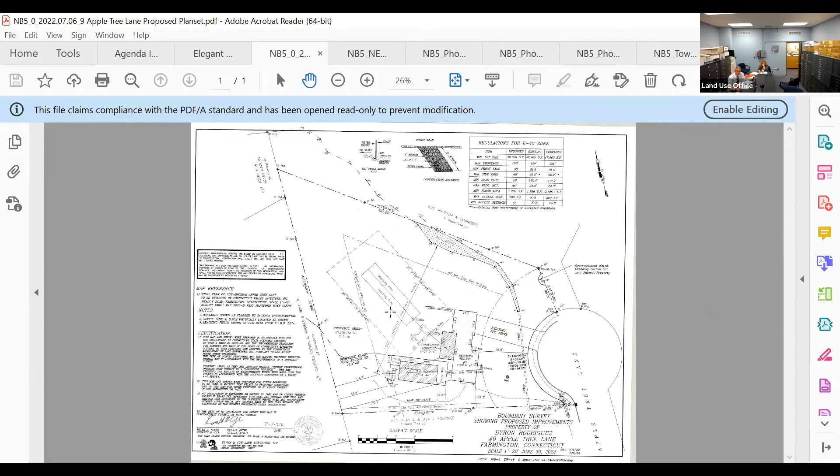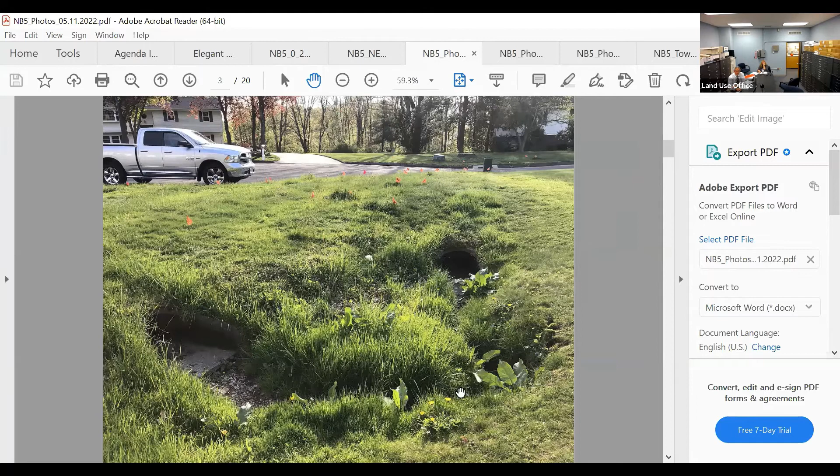So the applicant got his permit and got started working on it, and this is what it looked like before. This is the grass swale up off on the right going up to the north, coming underneath the driveway, and the same thing coming back out, heading out towards New Britain Avenue. This is again looking off the back property, and there's that grass swale up into this wetland area.

We went out there and photos were taken. That was on October 19th. So we went out there and this is what we found.

They had gone through and started grading up all that swale that was lined with grass. They excavated out that swale, cleared the back of the property, and disturbed all this wetland area. It looks like they were probably trying to attempt to formalize the swale.

This is off to the left side of the house as it goes up towards where the pool was, or is going. As part of that, we have access to some aerial photos. This is what it looked like before, on April 11th of this year. You can see the limits of the clearing, the lawn, and the swale area.

If you go back to the original plan, you'll notice that Mr. Jackson at that time didn't really know where the property boundary was. So he extended his A-line all the way to a stone wall, which is apparently on the northern side of the property line next door, at 11 Apple Tree, to the edge of 1100 New Britain Avenue, the next property over. There's a prominent stone wall there. I was able to find that pin in the corner, and actually we found both pins.

That helped me review the fact that there were some stakes there, which gives me an idea of where the wetland flags were. I spent a little more time yesterday on the property. At some point the owner came around and we had a little discussion. Now what's more clear is what's on the actual site, so I'm a little more confident to tell you where the wetland was and what it looked like on 9 Apple Tree.

Part of the reason is because Mr. Jackson was able to send me some aerial photographs, some of his photos that he took during the wetland delineation back in June. So I'm a little more clear as to what's going on there.

Yes, the bottom of the swale has been scarified and/or excavated. So I did probe first on the property within what had been excavated, to see what was underneath. I did not find any wetland soils or wetland subsoils within the swale on the property, which kind of makes sense, because this was an excavated swale that was probably done sometime prior to the development of this property.

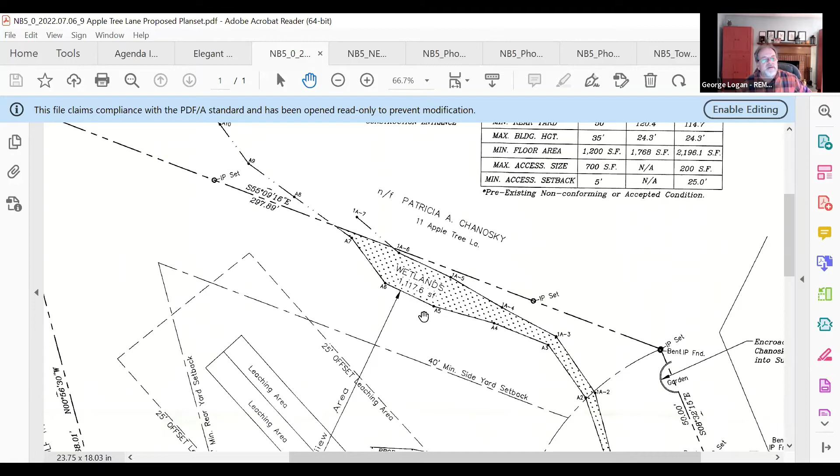And then once you start leaving, if we go northwest, things get a little more unclear to me there.

By the way, a little segue here. I did contact with the surveyor today. I asked him if he had any topography for at least the site, the 9 Apple Tree Lane. He says he thinks he does, and he will provide that, but there is no topography for the property to the north on 11. The only thing you could do there is look at the Connecticut, or basically the state GIS LiDAR from 2016, which is a 1-foot contour, which in my estimation is usually pretty accurate.

And what you will see there as this line goes up is that the grade has changed a little bit there. I don't know to what extent it's changed. So one of the things I would recommend, in order for me to tease out exactly what's going on there as far as soils and grading, is possibly a little topography to be done there by the surveyor. That would be very helpful.

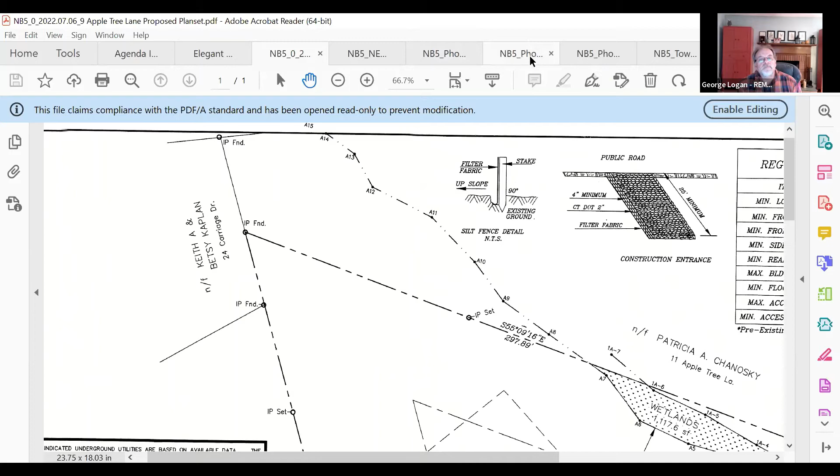Now, if you look at the aerial photographs, including the 2022 one, I looked at Google. I don't know if you have one that shows what I thought I was seeing. What you will see there... It's not as good resolution as what I had, but that's fine. For the next time, I'll make sure I send you everything so you can share.

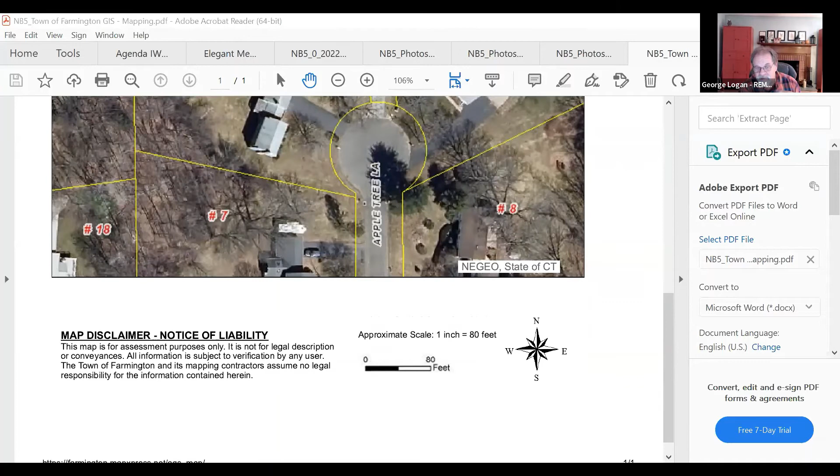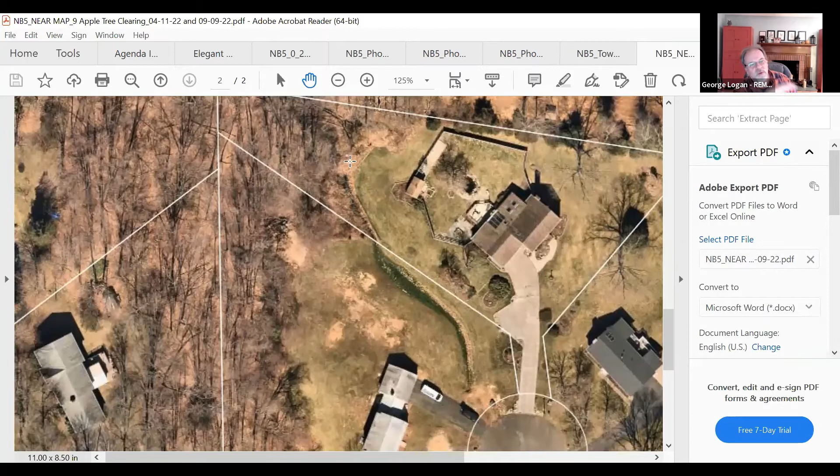But you can very much see the profile of a shallow dug ditch that extends through the site, the 11 Apple Tree, before it was cleared, and then it extends further to the north, through either the property at 1100 New Britain Avenue, the one that's immediately to the west.

So it's obvious that there's something there, but what you also see in the archival aerial photographs is that the wetland profile, from the signature of what I'm looking at, stops at that stone wall, and then there's a little break in the stone wall, and the water continues eventually to this dug ditch, which was an upland source for the most part.

Now, however, just on the south side of the stone wall, so on 11 Apple Tree, there are soil profiles, wetland, poorly drained soil profiles within the lower portion of the areas that exist today.

So that's kind of where I'm at. I think there is a little bit of an extension of a wetland, potentially from the northern properties onto 11 Apple Tree Lane.

I was wondering, because you can see that house was recently built and probably permitted just to the north, which is 1100 New Britain. I'm wondering if there is a plan one can avail that might show a wetland boundary that might be helpful to point us in the right direction. Because obviously this land on 11 Apple Tree has been so disturbed that I'm really having trouble trying to figure out if there has been a small change or a big change.

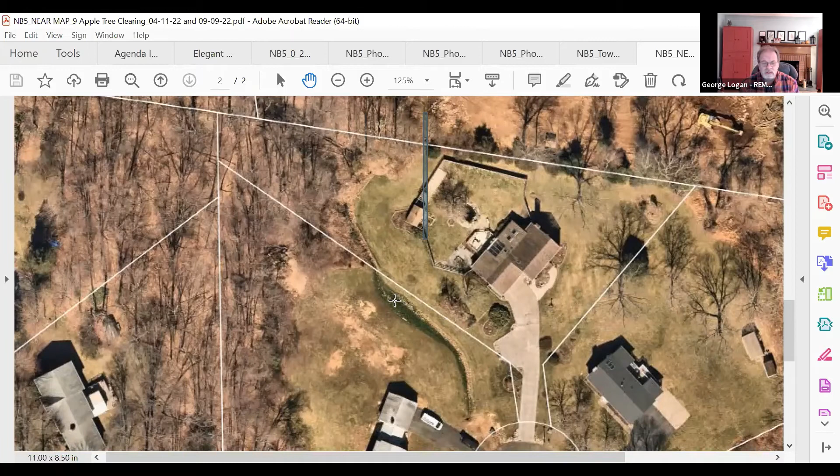Apart from that, in my view, we would have to at least put some straw down from the edge of the currently existing swale to a point, at least 25 to 30, maybe 40 feet up gradient of that. Because once you get above that, especially in the back of the site where most of the clearing has happened, the pitch goes to the other side, towards the west.

We wouldn't gain anything by strawing the whole thing down, but at least we need to do that strip to protect any proximal exposed soil while we come up with a plan for restoration. Obviously the restoration will be implemented during the growing season, so I'd need a little time to figure out some other things, especially on the property to the north on 11 Apple Tree, and come up with a plan satisfactory for the commission regarding restoration of a buffer to the regulated resource.

I'm wondering if it makes sense for the commission to look at what's out there now, or if Bruce and I and Shannon can just work those things out.

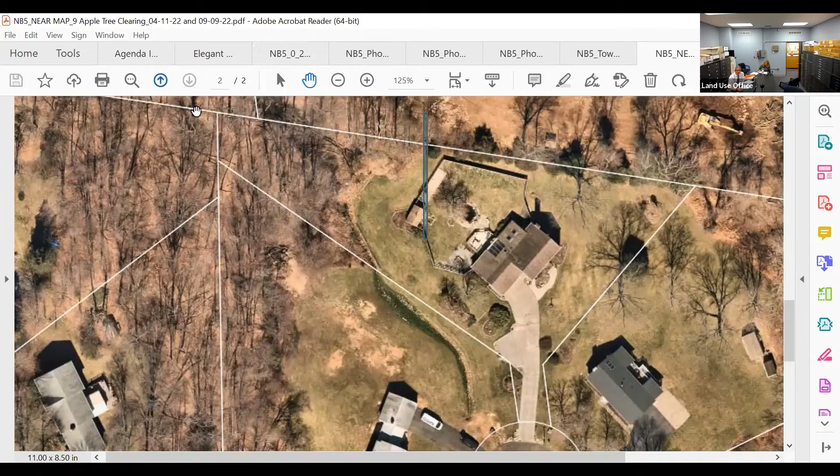I had also requested from the property owner to have the surveyor stake or locate this area, so we have a detailed plan of where the property line is and where this clearing has actually occurred, all on a map. Then from there George can develop his restoration plan. I'd like to see this stabilized.

I don't know, what were you saying, Jeff, or George, 25 feet? For where the good soils are? No, for the straw, sorry. I would say the straw would have to go up the slope from the swale. I wouldn't put it in the swale itself, because it would just wash away, but up from there where the exposed soil is coming down to it, so we don't get additional migration.

Into the swale, because I think you'd at least need this area before it goes into the curve. This part is flatter up here, but I think this needs to have a lot of heavy straw put down, as you said, with a few check dams.

Check dams, right. Now, one thing we might consider doing this winter or not - one of the restorations is obviously going to be how we restore the actual swale, which had grasses, and I saw some pictures.

The further up you went, the more wetland indicator plants there are. There's still some that remain on the northern side of the swale, like jewelweed and sticktights and the like.

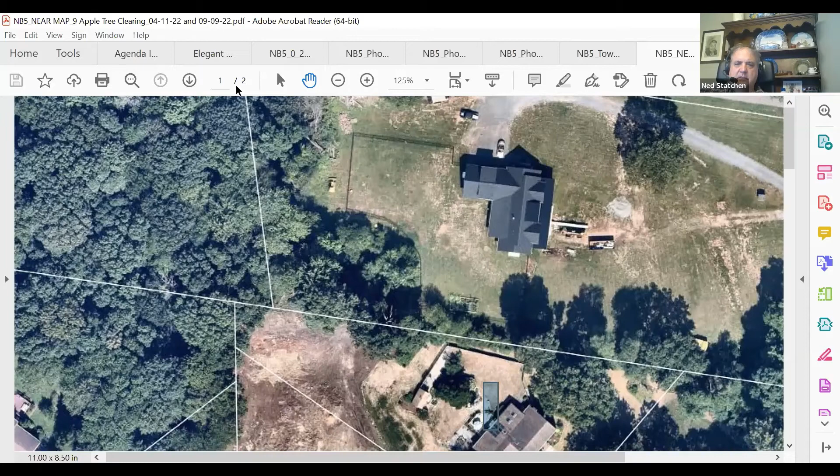My other question is on 11 — did he just mistake his property line and clear that out, or did she ask him to clear it? Do we know what happened there? I'll let them answer that question. Okay. Yeah, she did — I asked her and she told me to clean it out, to clear it out. Okay.

That's all I wanted to know, is if she was aware of it being cleaned out. Yeah, you there, Chair? I did talk to her too, and she was aware of it. Okay.

Chair, are you there? Robert. Yeah, oh, you probably saw the smoke coming up. I smelled something, but I said it's kind of far away.

So it looks as though there's a very significant area that right now is disturbed. So I guess what I'm not understanding, George, is how this whole area is going to be stabilized through the winter.

It's not just the wetland area, but it looks like everything's been clear cut and taken down to the raw dirt. So if that's the case, how do we stabilize it in a relatively short period of time? We've got a very small window to minimize any erosion issues for the winter, until the weather turns and things can actually grow. What do we do?

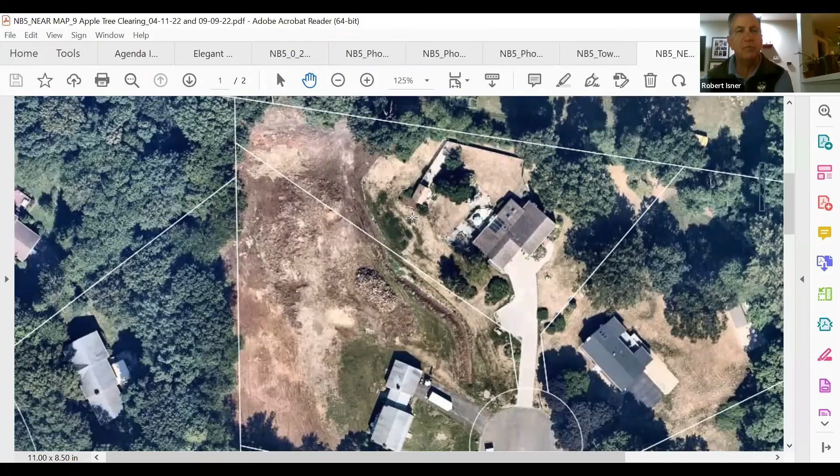What we'll see on December 7th will start the process on what the restoration plan to be carried out in the spring would be. But we have to take advantage of the very short opportunity to get the site stabilized so that there aren't more problems throughout the winter. And that's something that Bruce, we fully trust your judgment on those short-term decisions over the next couple of days. And George, Logan, you've worked with us to do enough restoration and soil erosion plans, you have a pretty good sense for what we'd be looking for as well.

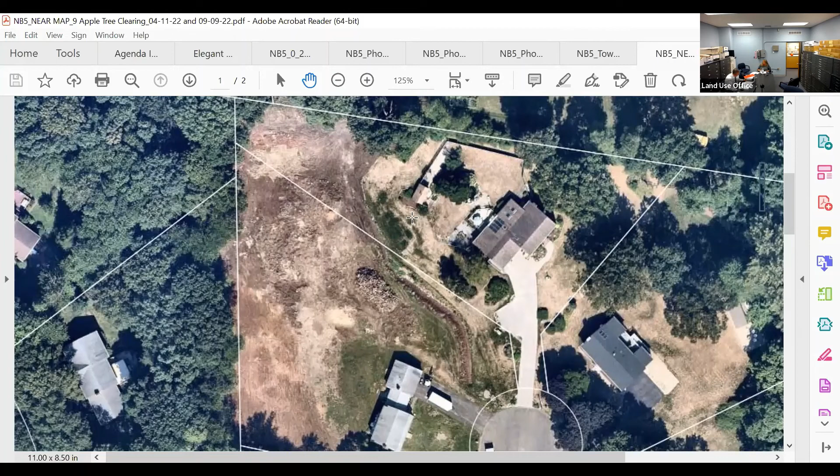So Bruce, does that help? Yes, it does, definitely, thank you. And what I'll do is, if we get whatever work we get done next week, I'll take some updated photos and I can get those over to the commission in the meantime, just so they have an understanding that everybody feels comfortable that our erosion control work has been completed.

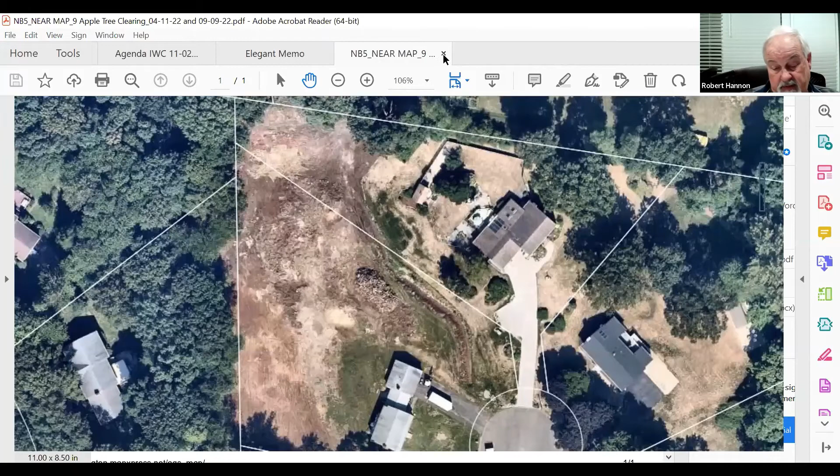You bringing up the proposed schedule? Yes, sir, I'll bid you all good night. Thank you so much. Thank you. Good night, George. Take care, good luck this weekend, George. All right, sounds good. Call me, thanks. Thank you for that. Good luck. Oh, you getting Nova Scotia lobster?